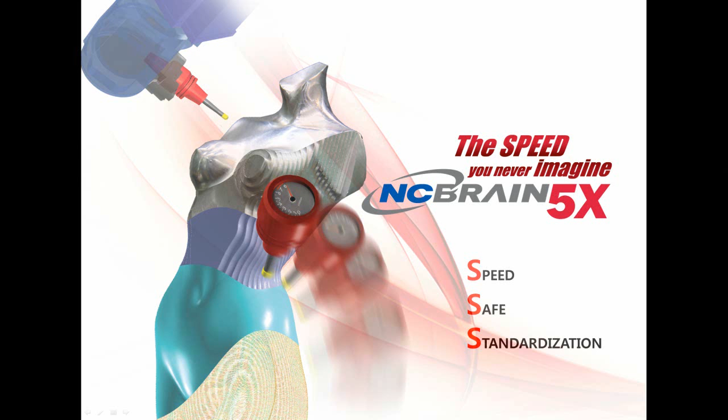When we do NC machining, we meet lots of problems, like how to increase more profit. Is there any way to do safer and faster machining? Is there any way to make top-notch standard technology? NCBrain 5X will solve these problems to succeed your business.

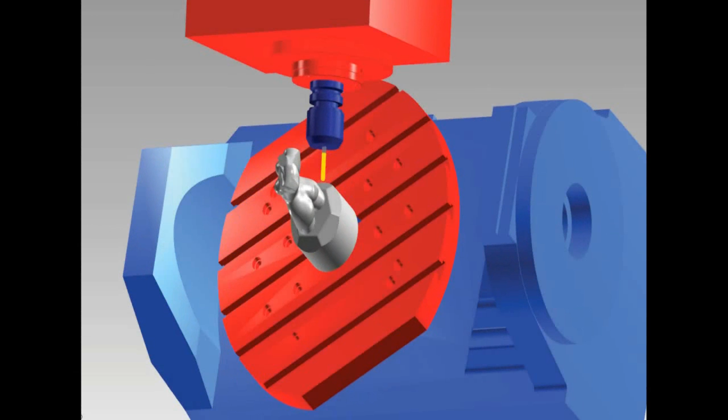What do we need to check before NC machining? The checklist for NC machining is machine collision, tool breakage, feed, RPM, air cut, and over-less cutting. It may be different depending on the engineer, so a variety of human errors will occur.

Now I'm going to show you a video of an accident that may occur during NC machining, for 20 seconds.

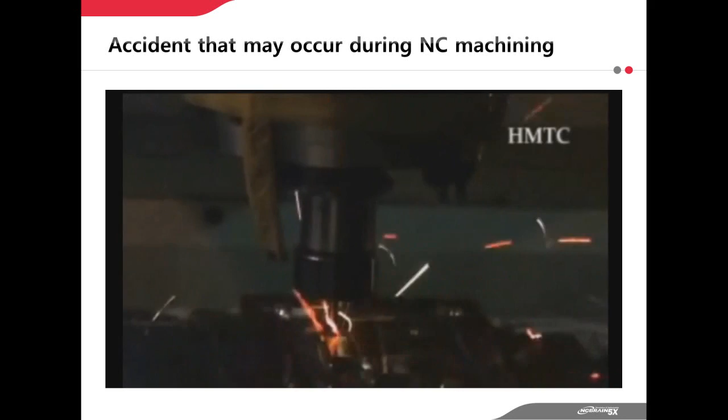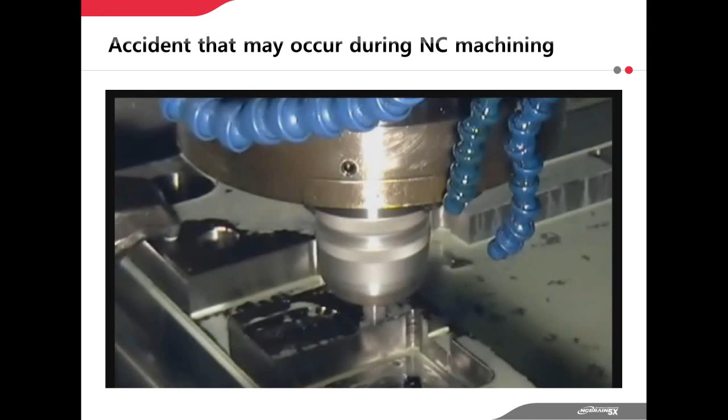As you've seen in this video, what do you think if NCBrain 5X solves these machining problems by one simulation? NCBrain 5X will make it possible to do the safest and fastest machining.

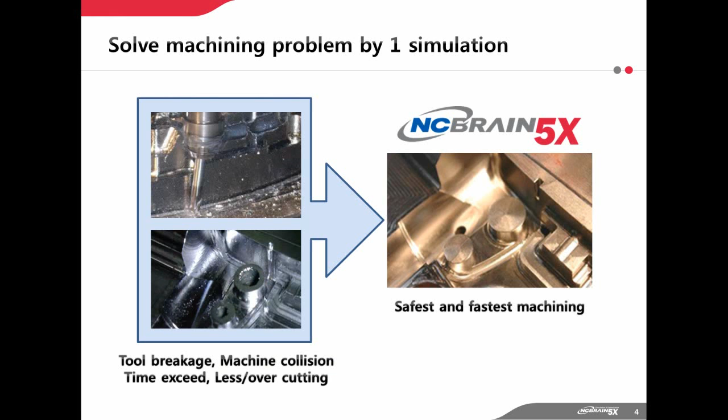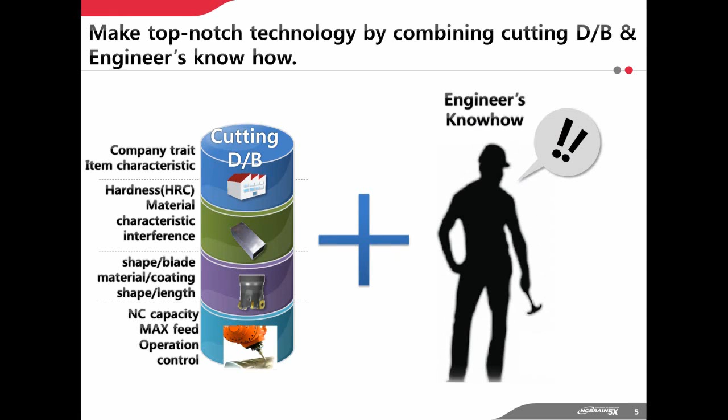When selecting cutting conditions, NCBrain 5X's cutting DB and engineers' know-how will make top-notch technology. How much profit will happen if this great system is applied to your company?

NCBrain 5X reduces 10% of machining time and 90% of tool breakage, and helps increase unmanned machining without worrying about any accident or collision, which will increase uptime rate after all. For example, if you earn $20,000 from a machine, 5X will make it 10% more efficient, which makes $24,000 additional profit per year.

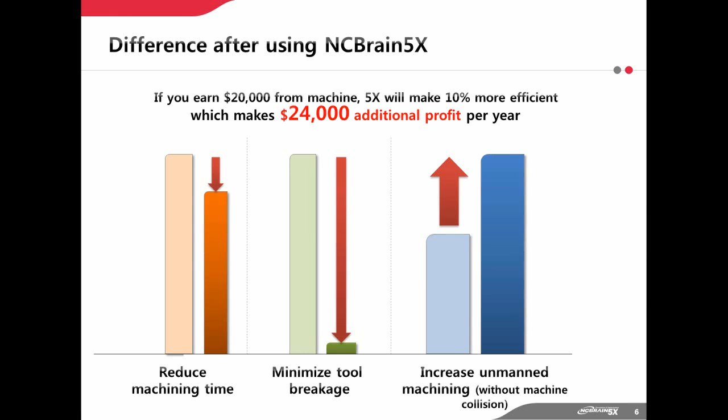NCBrain 5X realizes 7 great functions that need to be checked in the field by one simulation. NC data created by CAM will be regenerated into optimized NC data by simulation and verification. The optimized NC data makes the safest and fastest machining at all times without any accident.

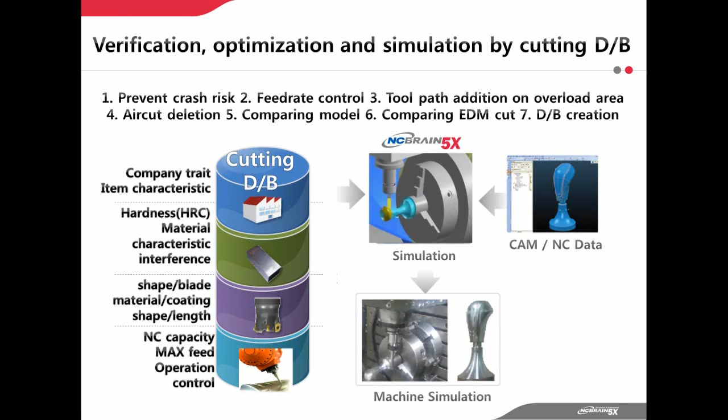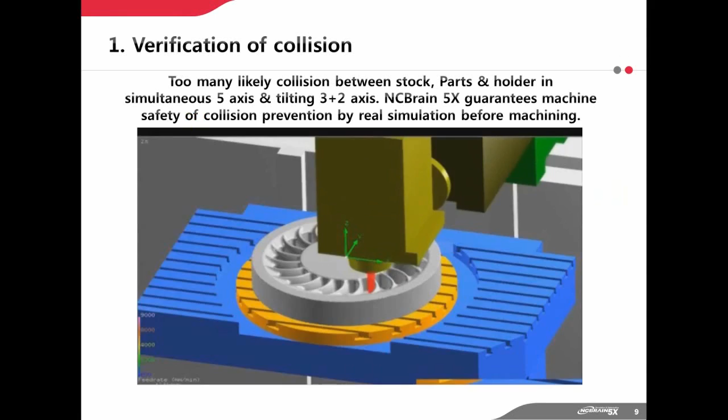Now I'm going to introduce the 7 great functions in NCBrain 5X. Firstly, what's going to happen if an expensive machining center collides?

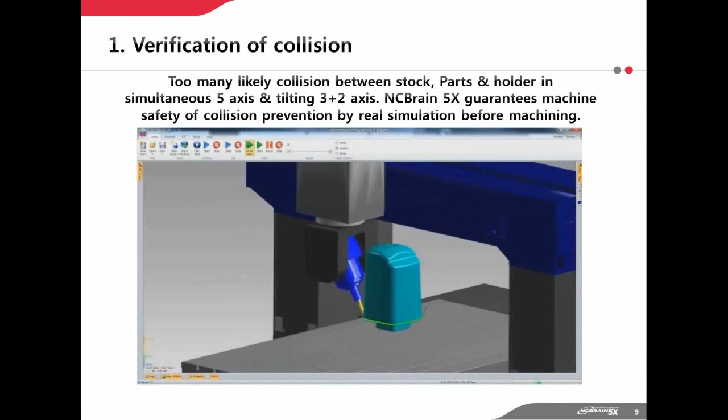As you see, it not only shows collision between holder and stock in red color with a log, but also shows collision between machine and stock, which can easily be corrected as you want. Preventing one small accident will save a lot of damage in time and expense after all.

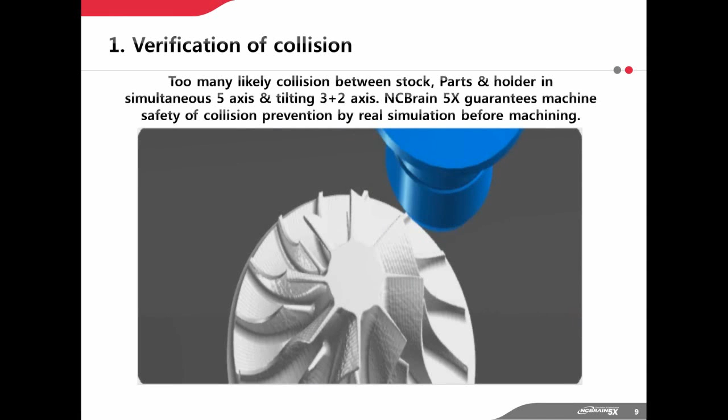Secondly, what's going on with feed rate? A safe feed rate fit for load may cause excessive machining time. NCBrain 5X controls feed rate according to load and saves machining time. Besides, it will minimize tool breakage and abrasion.

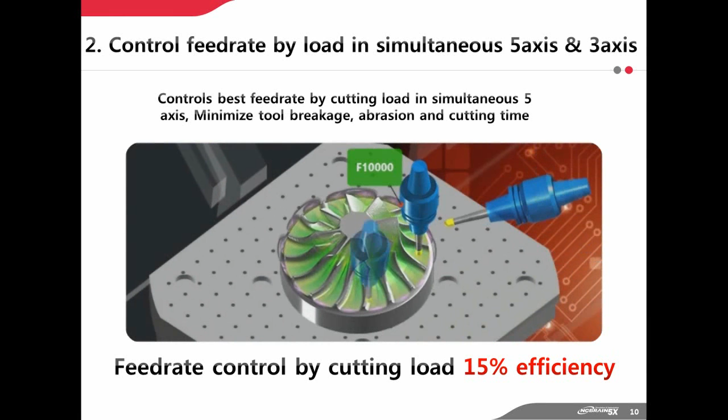The function mentioned above has been applied to 3-axis and is being applied to simultaneous 5-axis as well, which is the first development in the world.

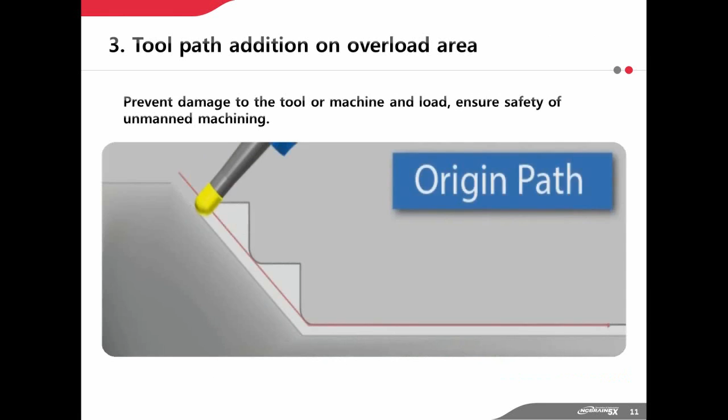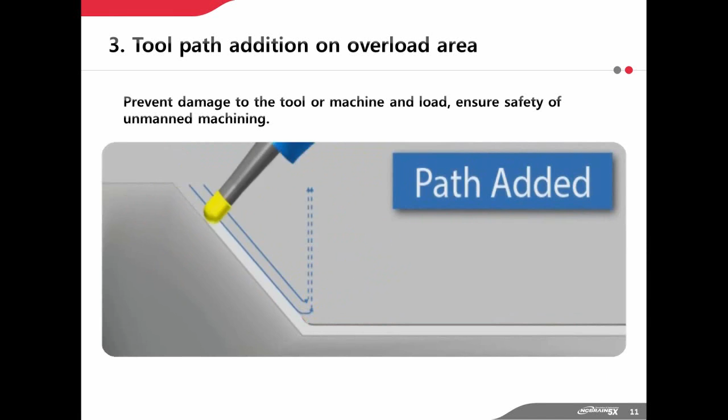Thirdly, tool breakage easily happens under excessive load. NCBrain 5X has a function called automatic tool path addition on overloaded areas, which prevents tool breakage and deterioration. In particular, this function helps safe machining without any accident during unmanned operation by ATC.

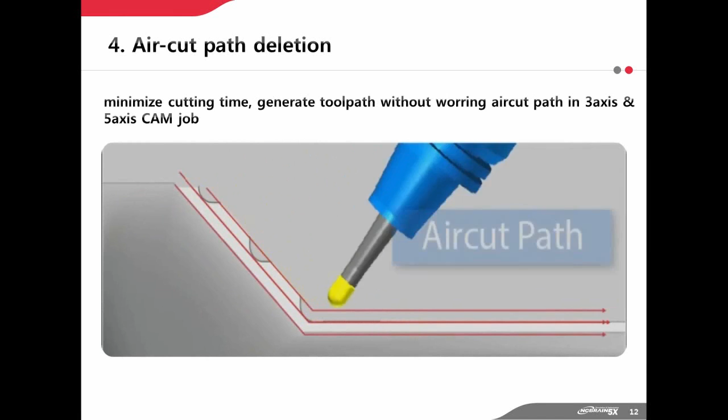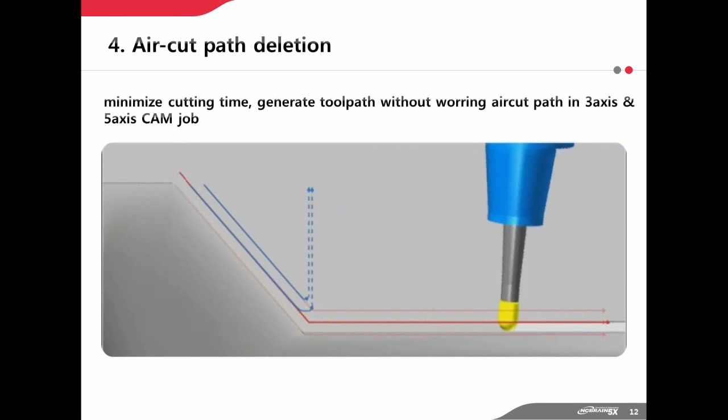Fourthly, you will face wasted machining time on air cut areas during operation. Considering this area, you have to create more detailed and stressful CAM. NCBrain 5X will save machining time by deleting this air cut area.

Fifthly, over and less cutting caused by NC data and wrong tool info will create big damage in the end. This function checks the over and less cutting by comparing the CAD and simulation model. You can prevent poor faults in advance, with size basis and naked eye.

NCBrain 5X's accuracy is 100,000th and is applicable to extremely sensitive files.

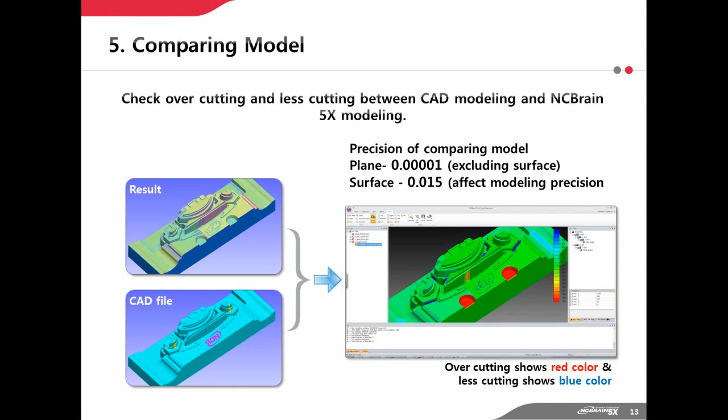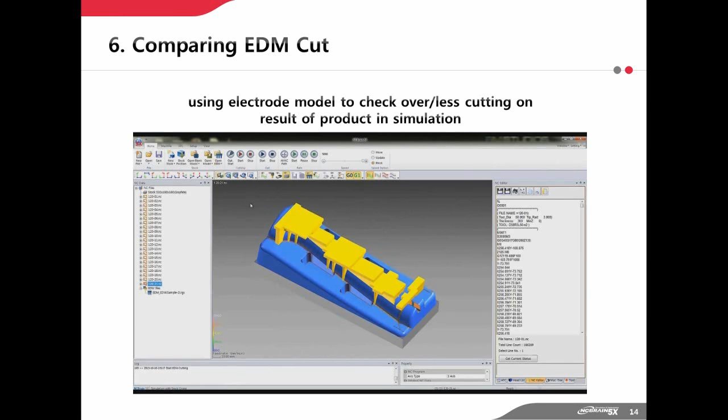Sixthly, it is comparing EDM cut. First of all, open the electrode model file to check over-less cutting on the result of the product in simulation. Next, the overcutting part will be shown in red color. The less cutting part will be shown in blue color.

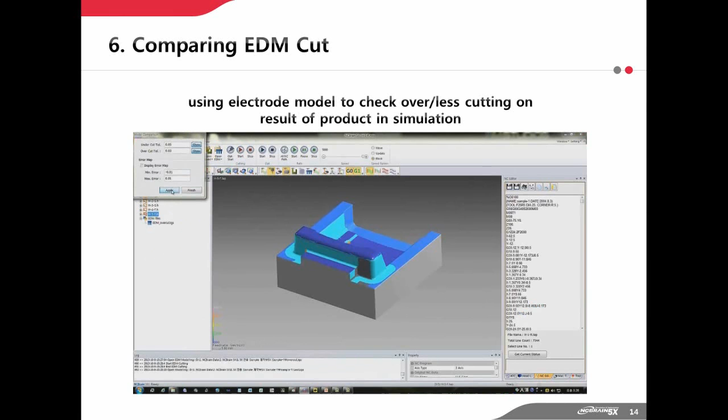This video is the smartphone core machining. You can see comparing using the electrode model to check over-less cutting on the result of the product in simulation during the rough process.

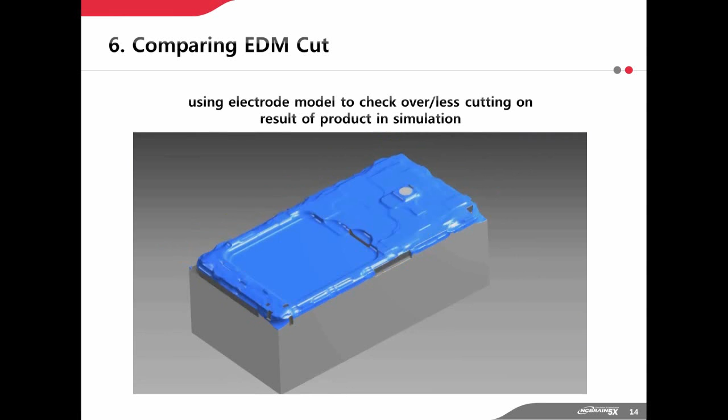Lastly, it is DB creation. How did you decide the most important cutting condition? Normally it depends on the engineer. NCBrain 5X decides cutting condition by optimization of cutting DB. As you see, DB and the 6 great functions can make fast, safe, and standard machining.

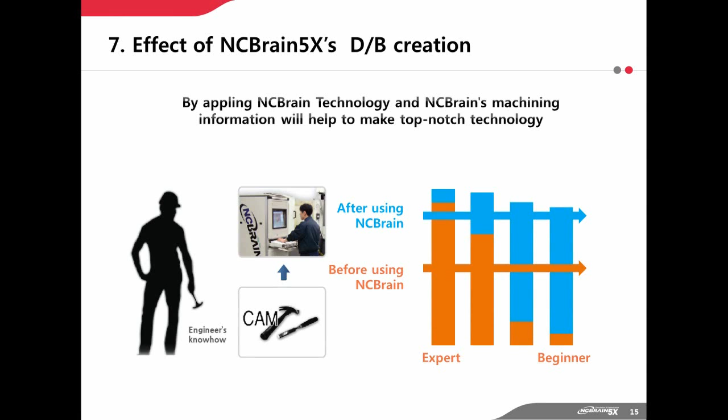NCBrain 5X will consider tools, machines, and stock to create DB. Consistently, if you upgrade the DB, you can have more machining efficiency.

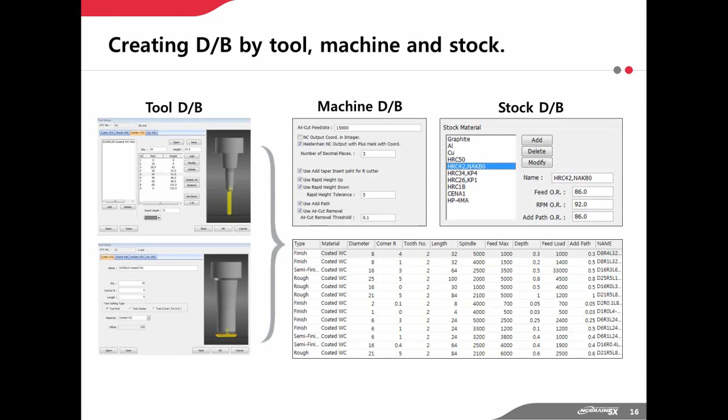NCBrain 5X has high precision and the best calculation speed in the NC machining field. Only NCBrain 5X can help do unmanned machining and reduce machining time. Also, NCBrain 5X's calculation speed is 6 times faster than other products.

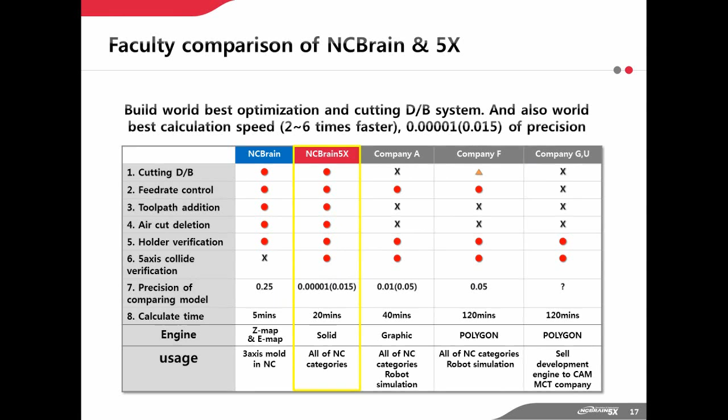NCBrain 5X combines NCBrain technology developed over 16 years with solid engine development. NCBrain has supplied top-notch standard technology for NC machining to approximately 1,500 clients and 6,000 seats, from top global companies to small companies.

What's going to happen if this great 5X system is applied to your company? If you want to maximize your profit with the safest and fastest machining, NCBrain 5X is not optional, but compulsory. Thank you.